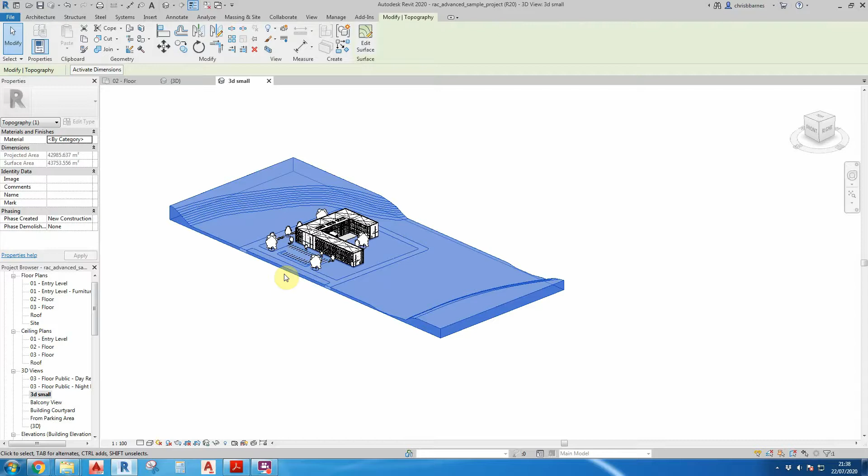Now what we can do is alter how this looks. We can change the detail, we can change the colors of it, we can even - from here we can see that it's got a section view, but we can't see this yet, so we're going to switch on the section box.

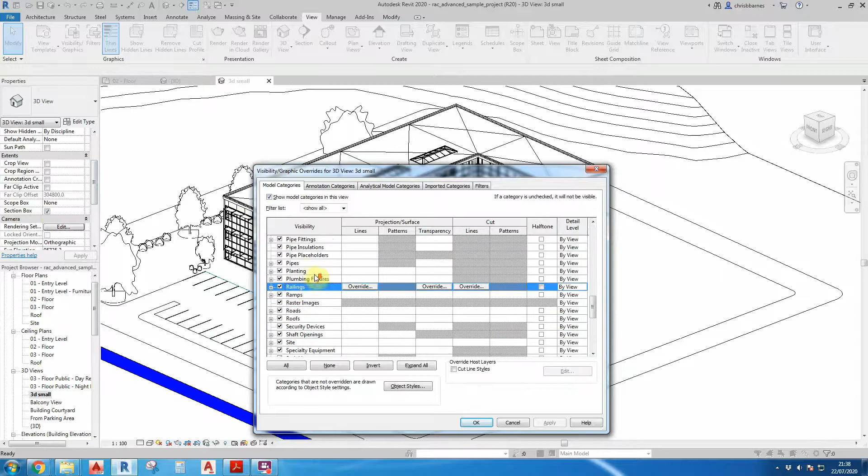Section boxes are on. We can switch off roofs, and we can hide other elements within there to give us the views that we want.

Once we've got these, changed it round, looked from a different angle, zoomed in on a particular area or anything like this, we can just save this again.

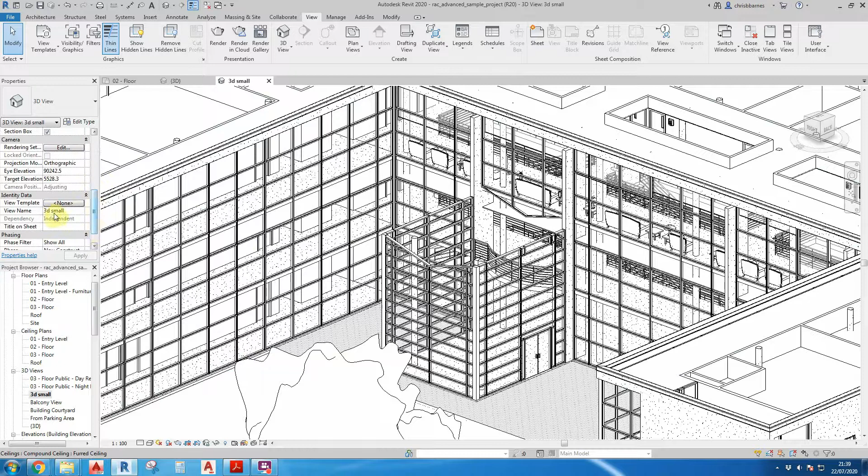As we've already called this 3D small, what you do is like these here, these are all ones that have already been pre-saved, and then we can just quickly jump to these views and see what's been happening in each of these views that have been set up, and then back to the original default.

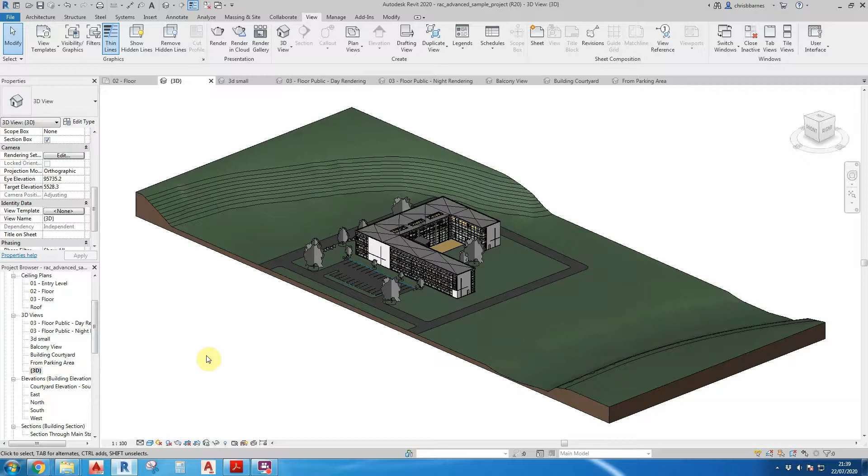So there's the 3D isometric views. If we want to look at a 3D perspective, what we need to do is be in a floor plan first, and then go into the view command, but instead of 3D view we want to click on this and then go to camera. This is where we place the camera anywhere in the building.

Such as in this corner of this room, and then we expand out our field of view. The further field of view you put it, the further that you'll actually see. So if we only put this to here, when we go to this particular view it will only be as far as where our cursor is at the moment, and the back of the room will be white and you wouldn't see anything. If we go as far as just outside the room, again our field of view depth would only be as far as where our cursor is.

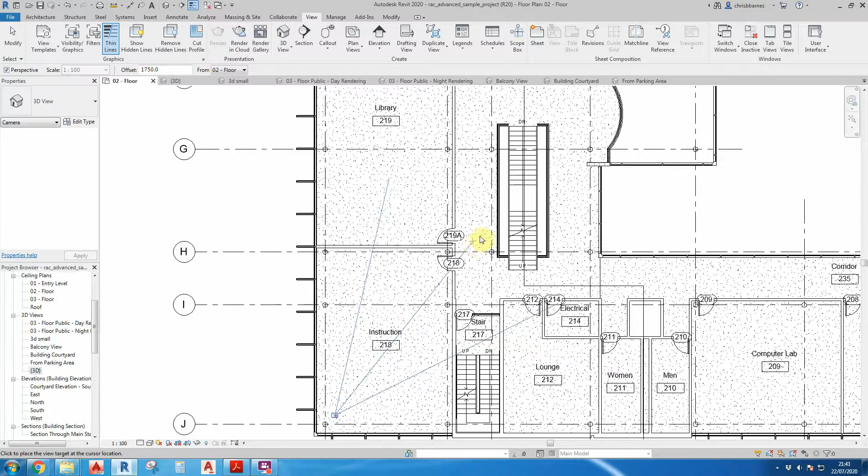If we use the navigation tool to walk through the building, we would still not see into the distance. We can change this, but it's best to go at least a fair bit for what you want, such as this, and I'll show you about changing the view depth later on.

So now we've got our view based on the camera angle that we positioned and our view depth as far as we can. What you're best off doing here is changing these colours to be a bit more realistic and to fine detail.

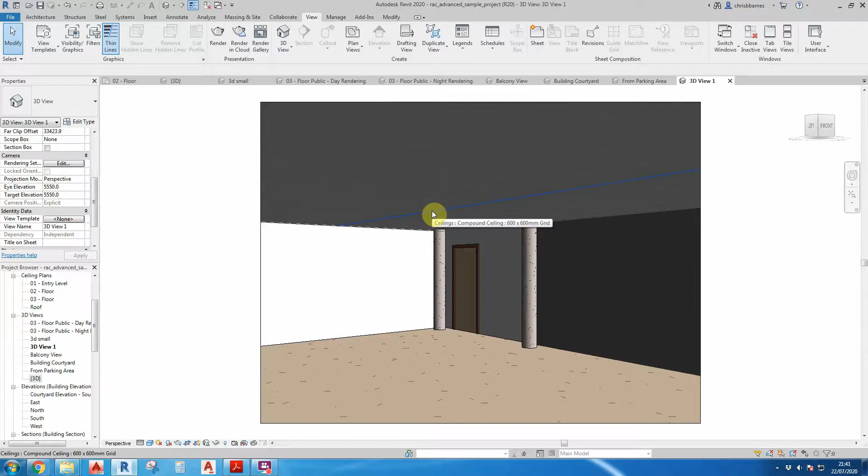Over on the left hand side you can see this here is our eye elevation. This is basically based on the floor level and the height. So obviously based off the ground floor, it's at 5.5 meters. This is obviously the second floor, which is what we call the first floor. And then also the target elevation, that's so we're looking horizontal as opposed to looking up or looking down.

Here, the far clip offset, that's our distance that we positioned our cursor when we first created the perspective view. So at the moment our field of view is at 33 meters, just under 33.5 meters.

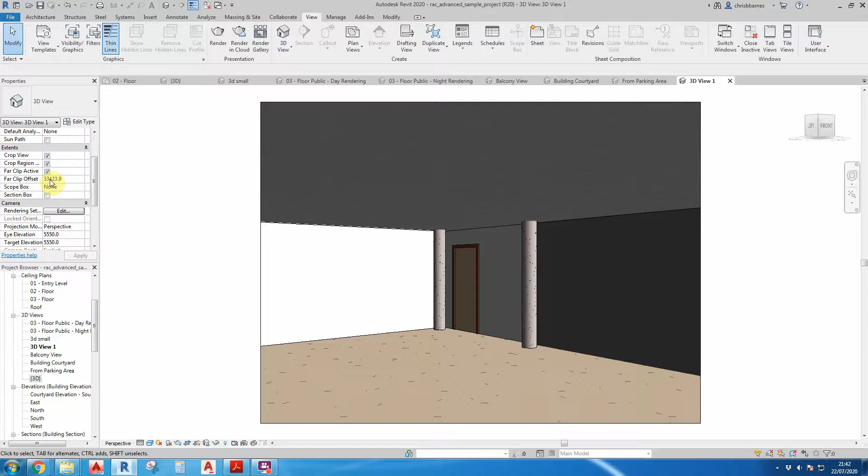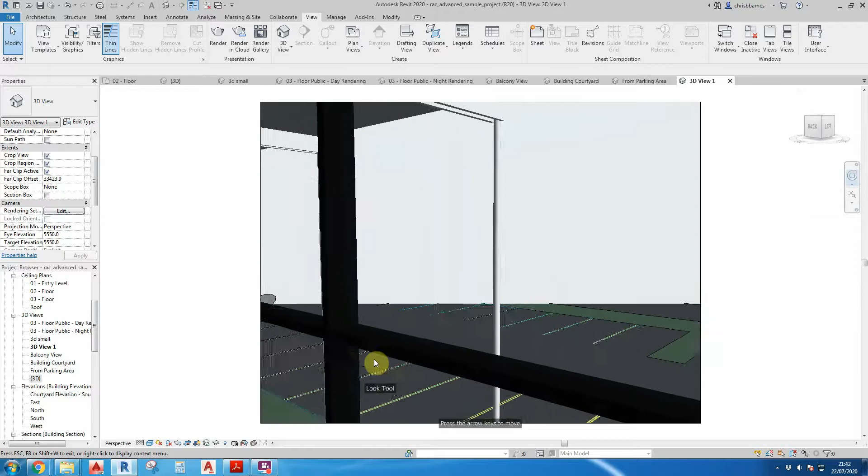If we grab our wheel, full navigation wheel, and position it in our field of view here, we can then use this to look around and see. As you can see in this particular example here, the car park, this is as far as 33.5 meters will take us.

If we want to look further to the other side of the car park, we need to change this offset to 50 meters. And as you can see, we can see further on now, and 100 meters.

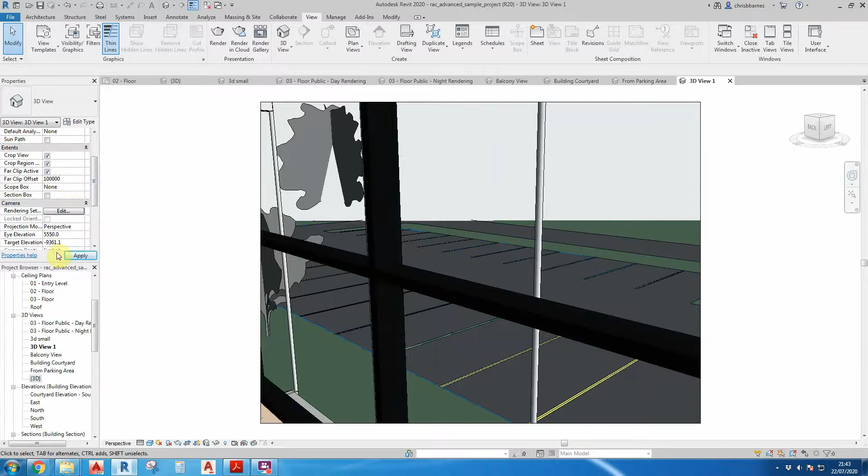And then we can use our wheel to either pan left and right or up or down, but there's also a separate up and down command which keeps you in line but takes you just in that one axis.

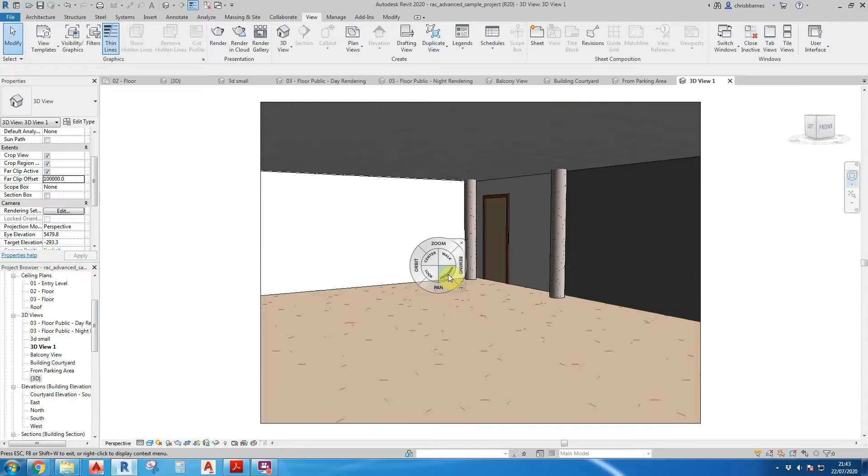And then we can also use it to actually walk through, and yes, you can walk through walls or doors, and now we can use it to look around. And don't forget, we're now at 100 meters distance viewing.

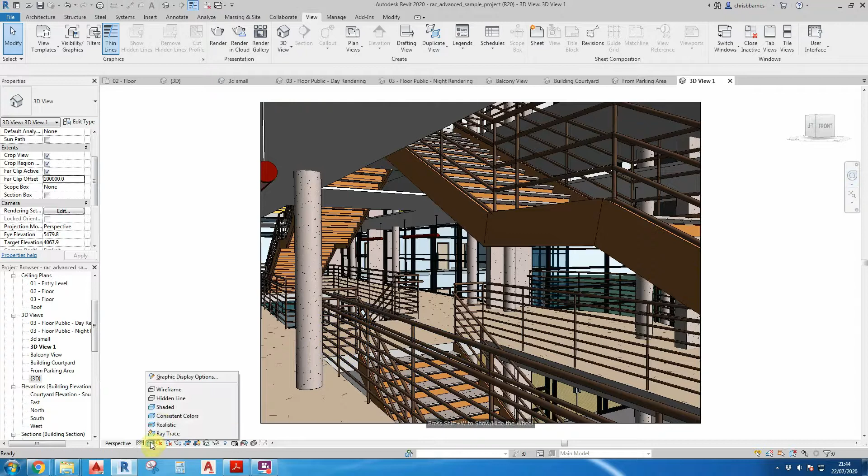Again, we can change, go back to just different views, different levels of detail, and even whether we want to see such things as the services within here.

So whether we want lighting in there or not. And as you can see, we just had a light disappear from this point here. If we put them back in again, look at this area here and you'll see a light up here. There you go, and there's just one just on the side there.

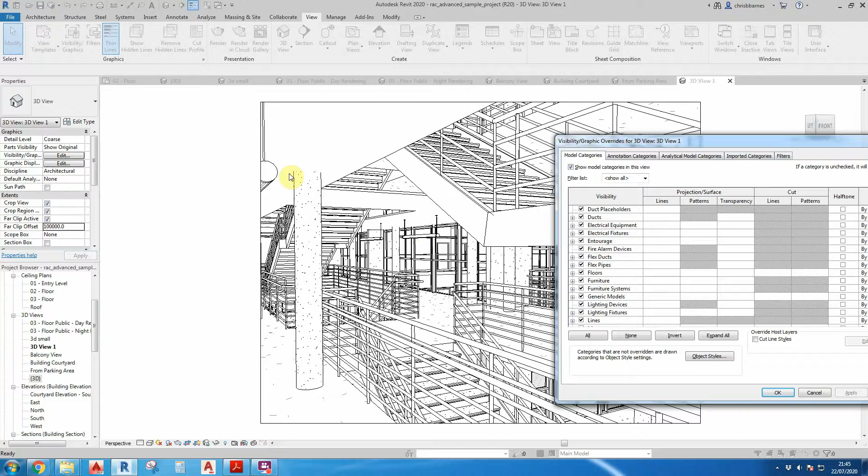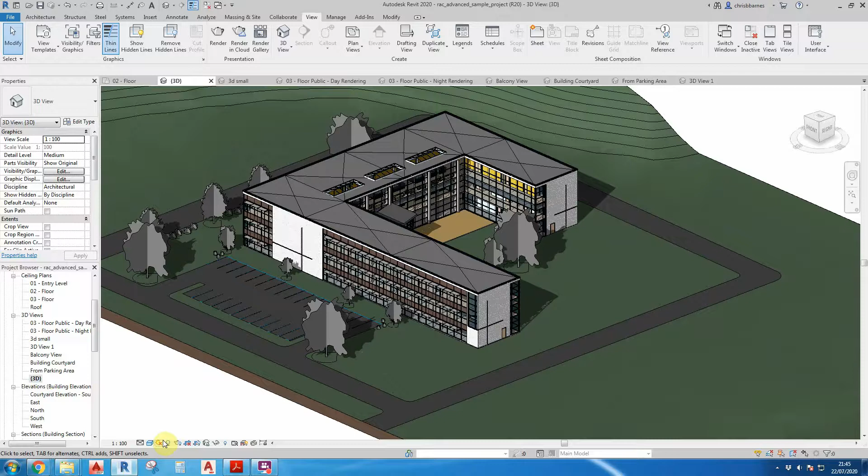Again, you can then save these views for later on. If we go back to the outside area here, we can switch on shading, and then we can apply the sun based on a particular angle or location and time of day and date. They can use this for solar studies, for when you're putting in solar, or even just heat loads for the HVAC.